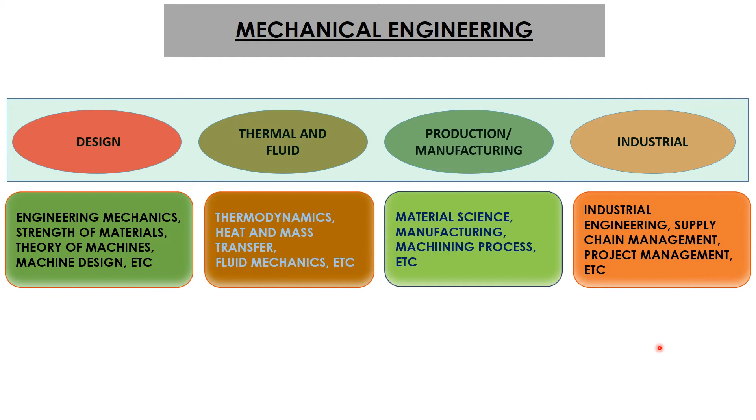This is the very basic structure of mechanical engineering. One should be well versed with at least these classifications, and then moving onward in mechanical engineering becomes quite logical and simple. There is a very famous statement I would like to quote.

Produce only after you check the physical and thermal strength of the material. Within this statement, 'produce' corresponds to production or industrial, 'physical' corresponds to design related subjects, and 'thermal' corresponds to your thermal and fluid group subjects. So this is more a realistic statement.

Our main objective is to design something innovative, something strong, which could be used further in various machines and automobiles. For that, you have to ensure that whatever component you design is safe. That safety with respect to strength or thermal aspect depends upon the application. Let's move ahead.

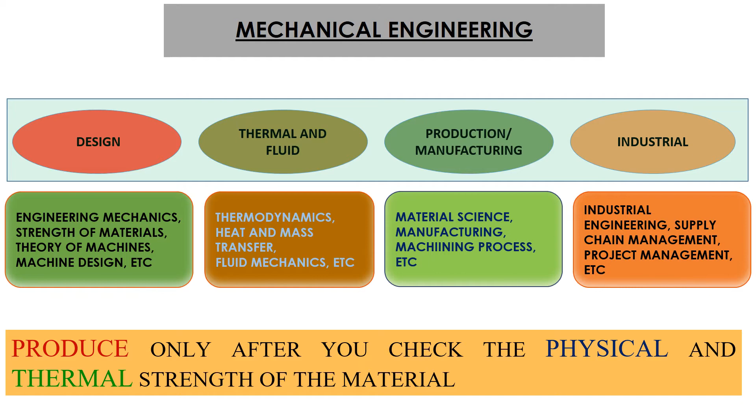Let's discuss some very general, very common applications. Take the example of piston. Now, piston we are well aware of—it is a core part of an engine, of an automobile engine. Suppose we have to design a piston for an automobile or for a machine.

In an automobile, within the engine cylinder, combustion takes place. High pressurized gases are there, and a good amount of heat is there. So this all comes onto the piston. The piston first shall be mechanically safe—it shall have good mechanical strength, because it has to bear heavy amounts of mechanical load.

In addition to mechanical strength, the piston shall also be strong enough to bear a good amount of heat generated during combustion. So to design a piston, you have two aspects: thermal aspect and design aspect. If your piston is strong both mechanically and thermally, then only it can be used in machines.

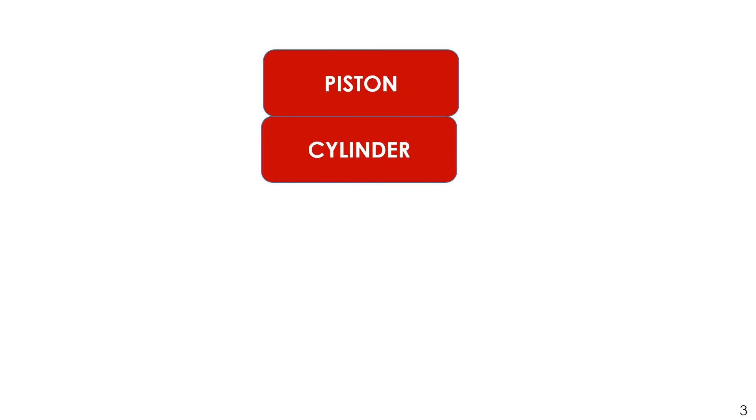Similarly, we have other examples—we have an engine cylinder, as I just told you. Numerous examples are there. Turbine blades, for instance—they should be strong enough with good mechanical strength, and they should also have good heat dissipating capacity and heat bearing capacity.

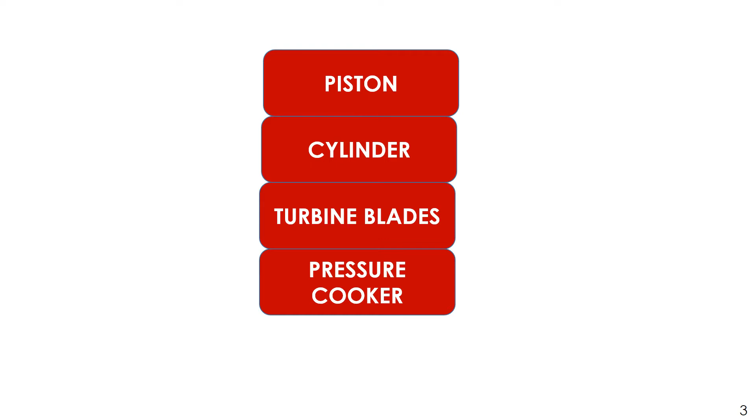And the pressure cooker, a very common example in our houses—daily we encounter this. It should be able to withhold that amount of pressure, which is a sort of mechanical load. Apart from that, the material should be able to withstand that amount of heat also.

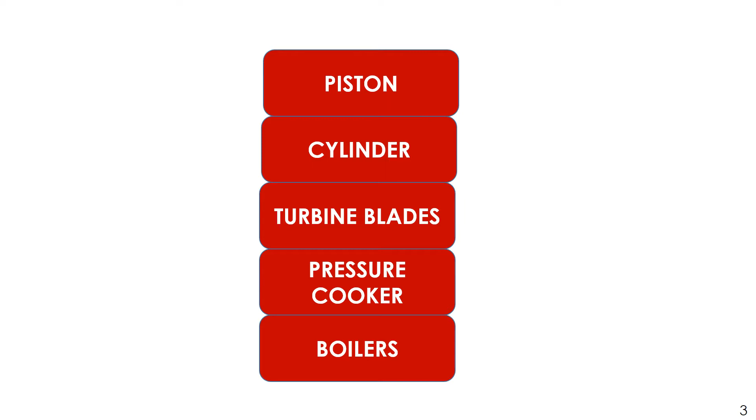We have numerous examples. Boilers, again a very common example—heavy boilers are there in industries, big machines with heavy boilers. In all these, your machine shall be strong both mechanically and thermally. This was just to make you aware of the relevance of the different categories we just discussed. Let's move ahead.

So I would like to go for some classification. As we classified mechanical engineering into several groups, similarly every subject, even every topic, has its own classification. The purpose of classification is to simplify the subject, so we should always thoroughly understand the classification.

That's very important. Engineering mechanics has been generally classified as particle mechanics, rigid body mechanics, and mechanics of deformable bodies. Here you can see particle mechanics and rigid body mechanics, so generally it is normally known as rigid body mechanics only.

So here we assume that every body is rigid. Once you take the body to be rigid, we classify it as statics and dynamics. Now statics we know, here we deal with the forces, we study the behavior of forces, we learn how to deal with the forces, but assuming that all the bodies are at rest. So that is what we do in statics.

When you come to dynamics, the word itself clarifies, dynamics means when all the bodies are in motion. But again, to simplify further, this dynamics has been subclassified into kinematics and kinetics.

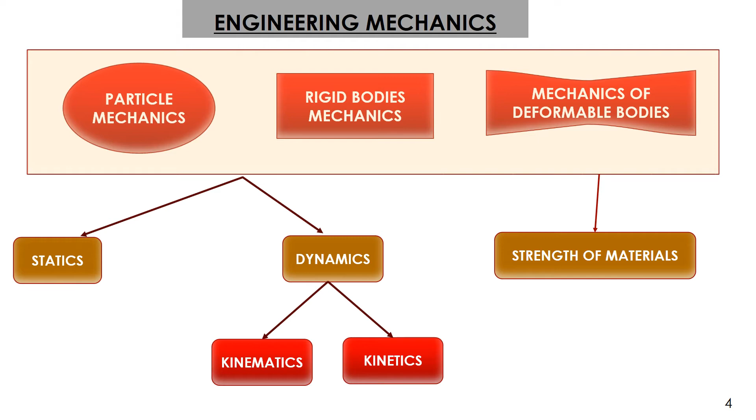Now let's move ahead, let's see what strength of material is in simple words. As the name indicates, strength of material, here you can see two very important words, strength and materials. This strength corresponds to the ability of the material to bear or to withstand load or stress up to a failure point, or till it fails.

The amount of load it can bear up to the failure point. That failure may take place by yielding or by fracture. Yielding means deformation, the beginning of the deformation, the material yields, the material has deformed. Fracture means the material has completely fractured, fracture means failed.

Now so this was about strength. Now when you talk about materials, we focus more on the properties of the material. Some of the very common properties we know: the materials can be isotropic materials, orthotropic materials, transversely isotropic materials, and anisotropic materials.

So broadly speaking, we have isotropic and anisotropic. Further, this orthotropic or transversely isotropic can be categorized into these two, under these two headings.

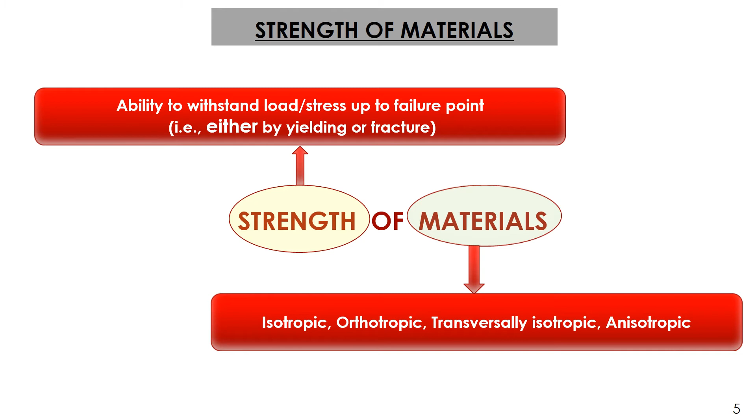You have to understand the strength of the material under different categories of properties. So let's discuss some of the very basic assumptions which we shall consider in our subject, strength of materials. These assumptions play a great role in any subject, because our main intention is to develop a component which is to be used in practical applications. We cannot take all the realistic conditions and design accordingly, so we try to approximate them. For that we need to go for some assumptions. So we'll discuss that. What are those assumptions?

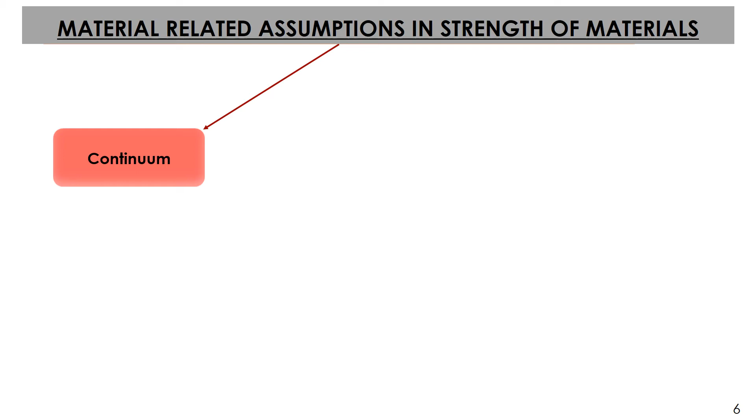See, one is the continuum. Whatever material you are selecting, we assume it to be a continuum material. Now what does this mean? Continuum basically refers to the whole matter in the body under consideration being uniformly or continuously distributed. Means the matter in the body is continuously distributed, or in other words, the matter fills the entire region of that material. So this is called continuum material. In reality, it is not possible, but we assume and approximate it, and it has worked well so far.

Then the material is isotropic. I've already discussed this in the previous slide, but just to brush up, the material which has similar properties in all directions is called isotropic material.

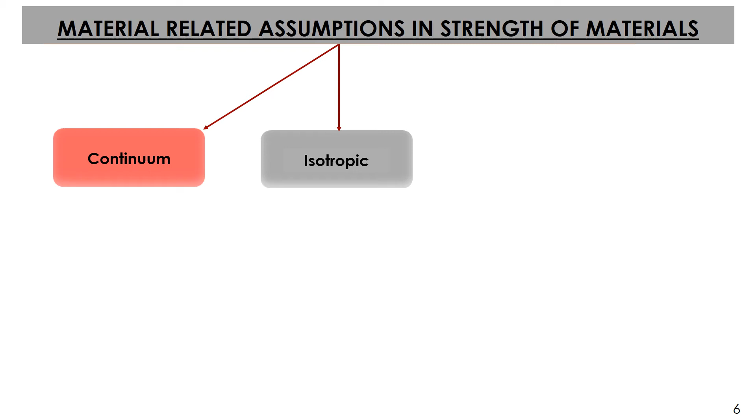Then comes homogeneous. The material shall be homogeneous. Homogeneity basically refers to the uniformity in the composition of the material; it is uniform throughout. That is called homogeneity or a homogeneous material. This is an important assumption. As an example, a variety of materials are taken to be homogeneous—some metals, glass, ceramics, some resins, numerous materials are there.

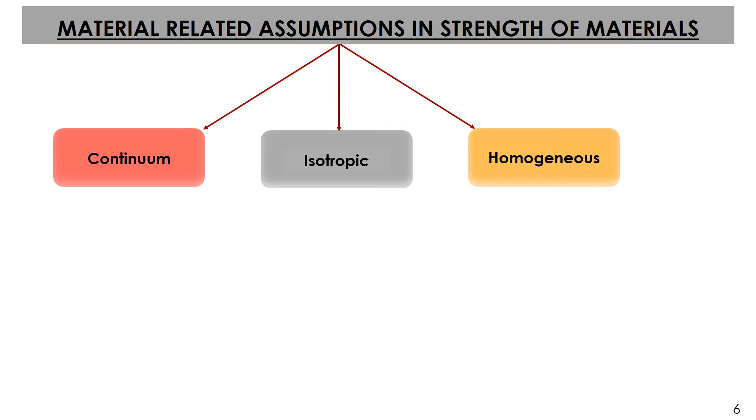So to sum it up, we assume or consider materials which are linear unimodular. Linear unimodular refers to them having the same modulus, same constant in tension as in compression. Then whatever material we are considering, it is free from cracks—there is no crack in the material. That's what we assume. Yes, we don't go for auxetic materials.

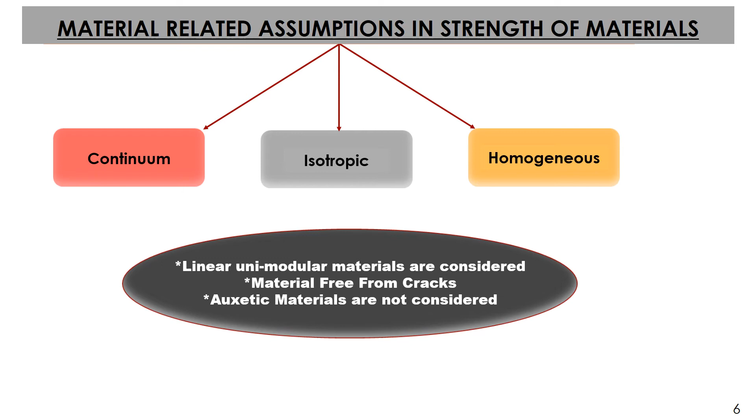Now what are auxetic materials? These are materials whose properties cannot be anticipated, because they exhibit unexpected behavior once subjected to some sort of mechanical loading. So those materials are called auxetic materials, and we are not considering auxetic materials here. So these are some of the assumptions.

Now, strength of material, as has been written here, is the basis for designing any structure or any machine component. Our sole objective as a designer is to prepare a safe component or structure to be used in some practical application. It shall not fail—that's very important. So the designer has to ensure the strength and safety of that component. This subject forms the basis for that.

Now you can see two words, structure and machine component. Structure is basically a very common word for civil engineers, used most commonly in civil engineering. Machine component is used in mechanical engineering. So this subject is the core subject of civil engineering as well as mechanical engineering—one of the very important subjects.

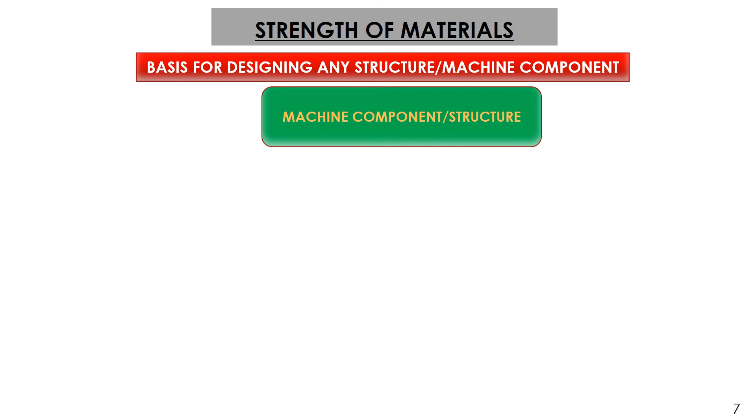So let's study the very basic cycle. As I was telling you, the designer has to ensure the safety of the component which has been designed. So our objective is to design a machine component or a structure which will be subjected to some sort of external loading once it is in use. Now this external loading—there is a whole science about how you apply load on the machine component.

So not a science, but full details are there of different types of loading. Some of the types I will quote here.

This external loading may be axial. What is axial loading? When you apply load parallel to the axis of the body. Then that may be bending, when you apply load perpendicular to the axis of the body, it will cause bending in the body. Torsion is when you apply load tangent to the axis of the body, and it will twist the body.

Similarly, we have impact loading, we have fatigue loading, or you can have a combination of these loadings also, called combined loading. This is all what we will be going through in strength of materials. Very important, because these are the loadings to which a component is subjected when it is in use.

Once your component is subjected to external load, the material will resist. That resistance may be in terms of forces or moments. These forces and moments we study in engineering mechanics. Then after you have these resistances, they will lead to stresses and strains, which we will study, along with their basic definitions, in the coming slides.

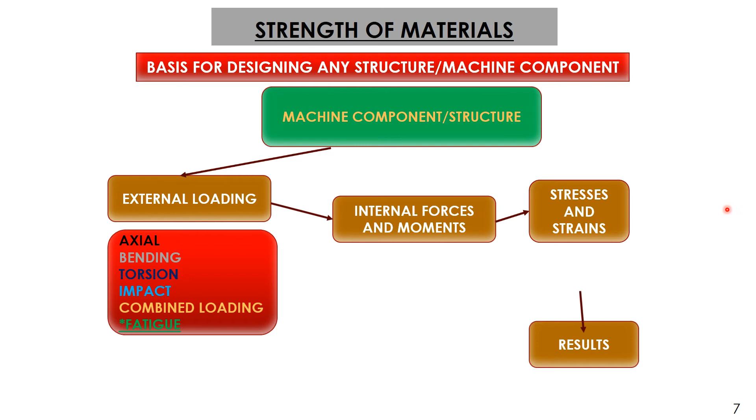So these internal forces and moments will lead to stress and strain, and for the designer this is of most importance. The results of these stresses and strains are to be analyzed thoroughly, and then a designer reaches a solution on whether the design component is safe or has failed. This is a very basic cycle of a design.

Let me put this design, or strength of material, in three words: load, stress, and strain. This is all - this is strength of material, or this is design. Rather, it is strength of material basically.

When you apply load on the material, it will exhibit or show some sort of stress, and stress will lead to some sort of strain, and then you can decide whether your material is safe or not. So load, stress, and strain - just remember that.

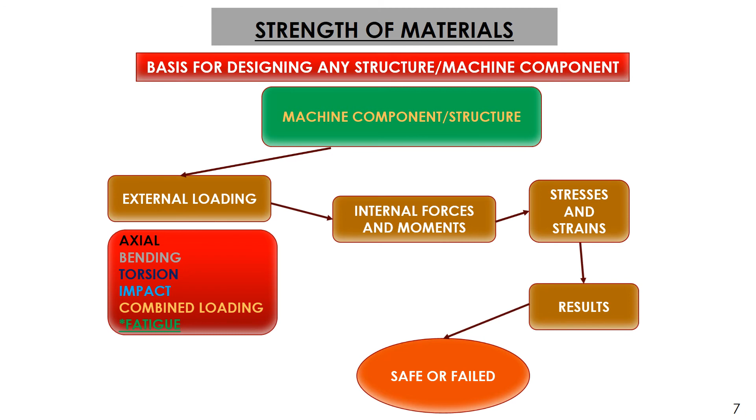So the load or the forces - that's one and the same thing. Let's see what is a simple stress. It is the internal resistance offered per unit area of the material to the external load. This is called a simple stress.

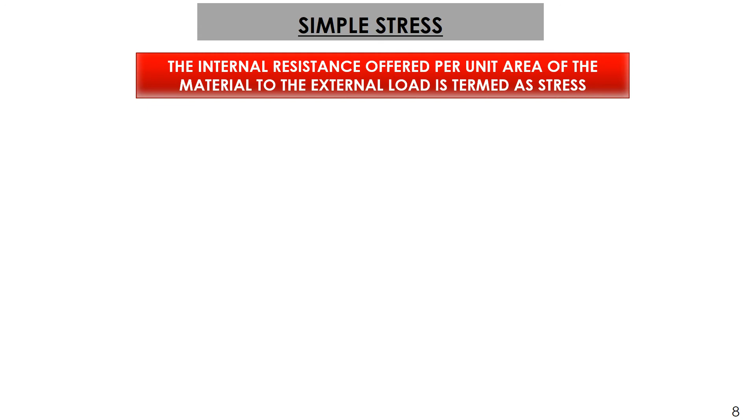So it is nothing but the resistance being offered by the material. When you take it per unit area, it is called stress. Let me take an example.

What I have taken here, I have shown you two components. One component is subjected to tensile load along the axis of the body, and the other component is subjected to compressive load, again along the axis of the body. So what will happen here?

Once these components are subjected to these external loads, internal resistance will develop within the material. Let's see - these are the internal resistances. On this side, to this pull, the material has shown a pull - it's a resistance. On this side, if you take push, the material has shown a push. So the pull gets pull in terms of resistance, and the push gets push in terms of resistance.

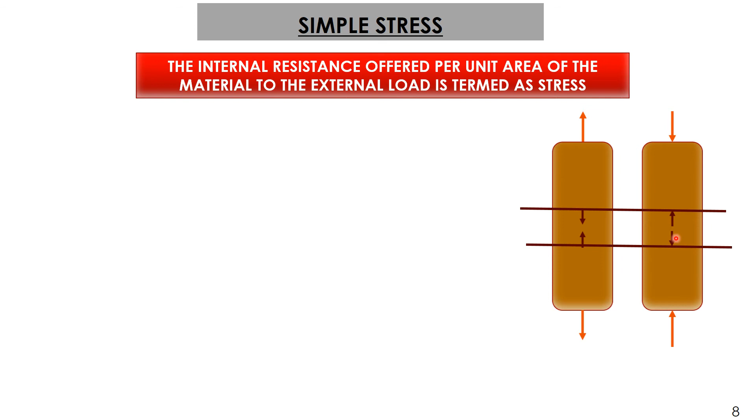In other words, we can say if this is the external load and this is the stress, a material can have tensile stress, a material can have compressive stress. It depends upon the external loading.

Mathematically, the stress is defined, as mentioned earlier also, as force per unit area. Now why is this word 'average stress' being used here?

See, practically what happens - if you take a machine component, let's say this is a machine component and this is the external load. You can have various loadings, not only a single load. Let me say this may be one more external load - you can have multiple external loads. Now to this external load, if you take a section within the material, this is a cross section.

If you view it from a side, let's say this is the cross section of the material.

So this material is exhibiting some sort of resistance. This cross section has infinite points, as I'm trying to show you here. Resistance, or let's say a force, the resisting force or stress, is shown by every point, not just one point. All the points exhibit some sort of resistance.

So to sum up, if we consolidate it for the whole section, that's why we term it as average stress. This is very, very important once you understand it. So this average stress term is used because of this only.

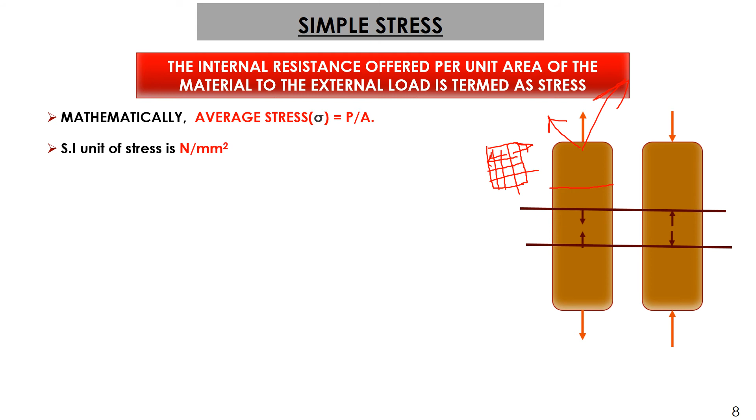So let's move ahead. The SI unit of stress is newtons per mm square, or newtons per meter square, or Pascal, or megapascals. These are the SI units.

Now, very commonly two terms have been used: true stress and engineering stress. What is true stress? Let me read it: the area of the cross section usually decreases with the increase in elongation, and the stress calculated using that instantaneous area is called true stress. I will try to show you here.

Let's say this is a specimen subjected to a tensile load, as I've already told you. Let's suppose this material is ductile; it has the ability to elongate. So because of this load, it will elongate. Let's suppose this material has elongated, and this is the final shape of that material. It is not curved, it is straight, though I'm not able to draw it straight. I'm just trying to show you that it has elongated. So what is happening here? You can see this cross-section area has decreased.

Now, if you calculate stress by taking this decreased area, that will be true stress. Now it depends on wherever you want to calculate the area. So wherever basically indicates - I will tell you there is a phenomenon. For a ductile material, if you elongate it, what will happen?

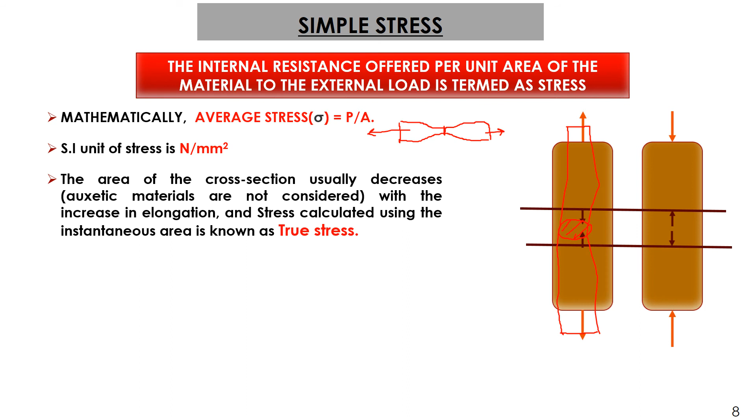Now on the other side, we have engineering stress, which is used in the majority of engineering applications. This is calculated by dividing the load acting on the specimen or the component by the initial cross-section area. It is called engineering stress.

One important note is there. We all very well know about this principle of transmissibility of force - we have studied this in engineering mechanics. For a rigid body, we have used this principle, which states that if you shift the force without changing its line of action, it won't change its impact on the rigid body. There won't be any change in the impact of this force on the rigid body.

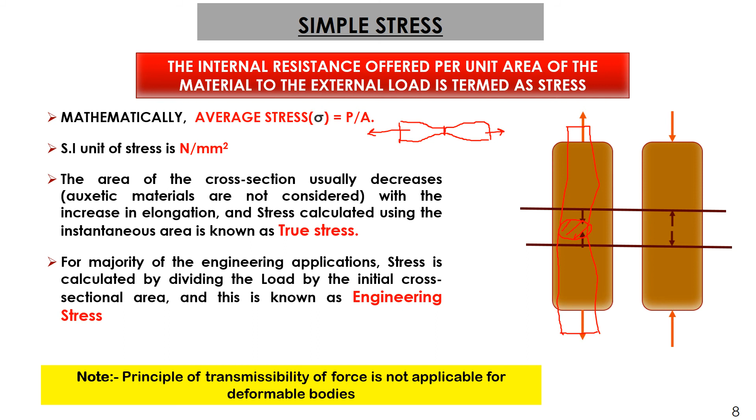So that is true only for rigid bodies, but it cannot be taken for deformable bodies. And now we are dealing with deformable bodies, so this principle of transmissibility of force is not to be considered for deformable bodies.

Now coming to strain - again, the last component of that cycle: load, stress and strain. Important component. Now what is strain? The change in the original dimension that takes place when a body is subjected to some external force - that I have shown you in the previous slide also. And when you take the ratio of change in dimension to the original dimension, it is known as strain.

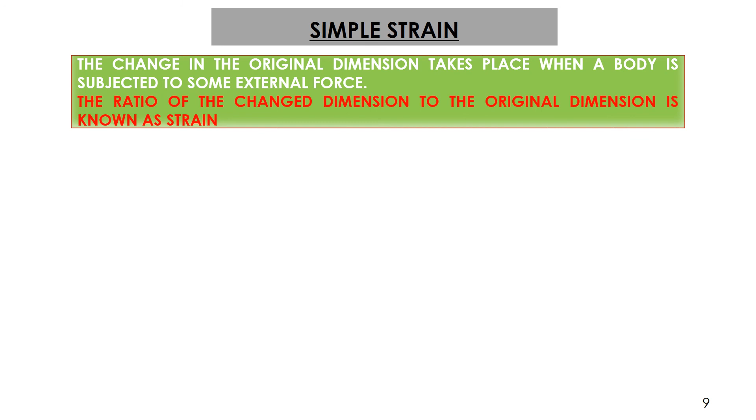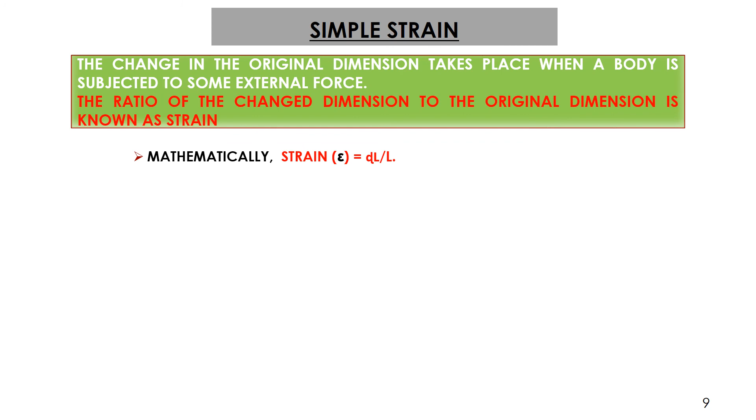So that dimension can be length, width, or any other dimension. The ratio of change in dimension to the original dimension is called strain. Mathematically, it is the ratio of change in dimension to the original dimension. Since we have the same dimension in numerator and denominator, there won't be any unit—it is dimensionless. Here also we have two terms: true strain and engineering strain.

On the same lines as what we discussed for true stress, I will take the same example of continuous decrease in cross-sectional area. So the length is also increasing, the gauge length. Now, what is this gauge length basically?

Say if this is a tensile specimen, you have a specimen. Let me show you here. Let's say this is a specimen. You will mount it on some machine, let it be a universal testing machine. You want to apply tensile load—forget the machine, we have applied a tensile load.

When the load is applied, this gauge length will increase, and it will keep on changing. So at an instant, if you want to find the true strain, you have to take the ratio of instantaneous change in gauge length to the instantaneous gauge length. Meaning, at that very instant, you find the gauge length and the change in gauge length, and take their ratio—that is true strain.

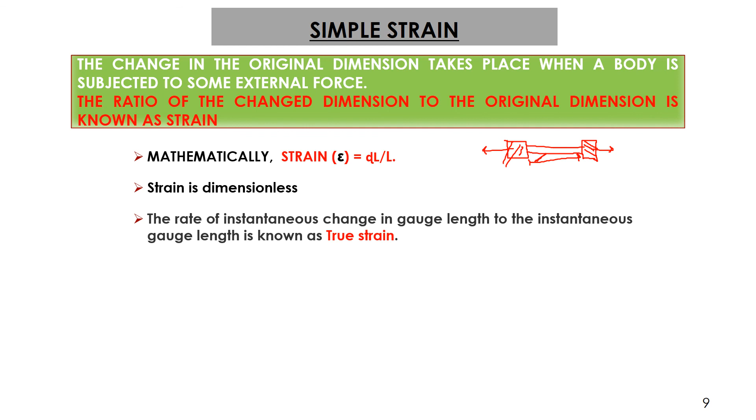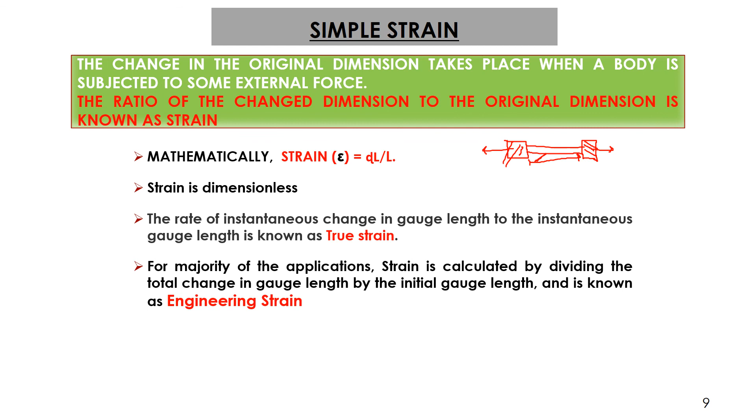Then what is engineering strain? It is calculated by dividing the total change in gauge length by the initial gauge length, and it is called engineering strain. So these are the basic definitions of true strain and engineering strain. So we have discussed what is simple stress and what is simple strain.

Now, what is the objective of having true stress and engineering stress strain? The engineering stress-strain helps designers learn about the capability of the material to withstand load in tension, before the specimen starts showing unstable behavior. So it gives you the wholesome value of the material, as I've shown with the necking phenomena taking place. The engineering stress gives us an indication of the beginning of that necking process—it gives you a wholesome idea.